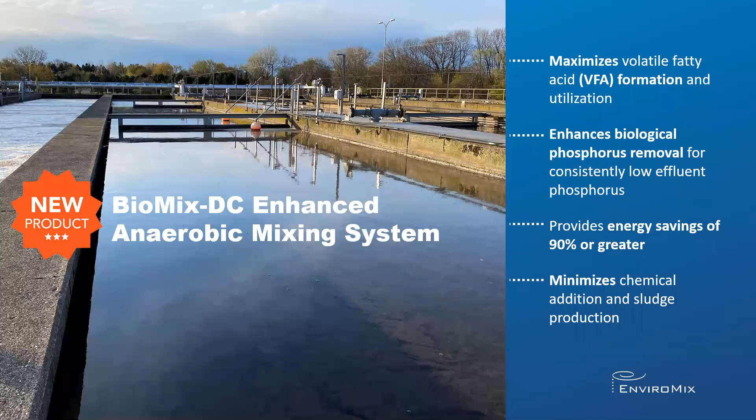BioMix DC Enhanced Anaerobic Mixing System maximizes volatile fatty acid formation and utilization by the biomass. BioMix DC enhances biological phosphorus removal for consistently low effluent phosphorus. BioMix DC provides energy savings of 90% or greater, and minimizes chemical addition and sludge production.

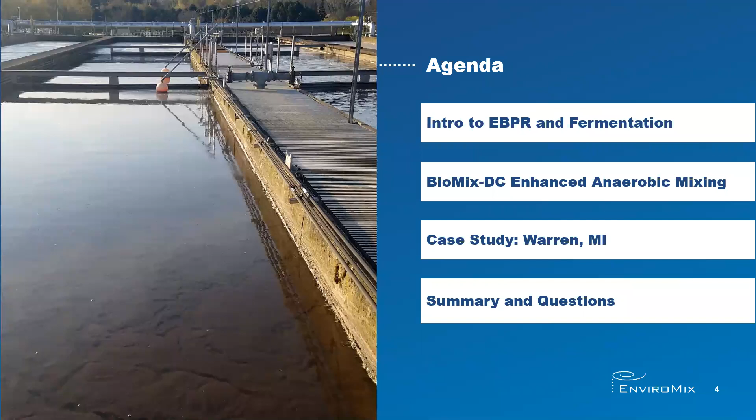Today's agenda for the presentation will be an introduction to enhanced biological phosphorus removal and anaerobic fermentation, introduction of Enviromix's BioMix DC Enhanced Anaerobic Mixing System. We will present details of the Warren, Michigan case study with results of BioMix DC performance. And finally, we'll provide a summary and answer a few audience questions.

Before we move on, we'd like to ask the audience a question. Do you currently have phosphorus regulations? We'll give you a couple moments to respond.

Okay, let's review the results of the survey. Well, from the results, it looks like the majority of those that responded already have a phosphorus regulation or expecting them in the future. That's perfect because this presentation should be of great interest to you.

Now we'd like to provide a brief introduction of enhanced biological phosphorus removal and anaerobic fermentation. Enhanced biological phosphorus removal, or EBPR, relies on the selection and proliferation of a specialized microbial population capable of taking up phosphorus in greater amounts than their normal biological growth requirements.

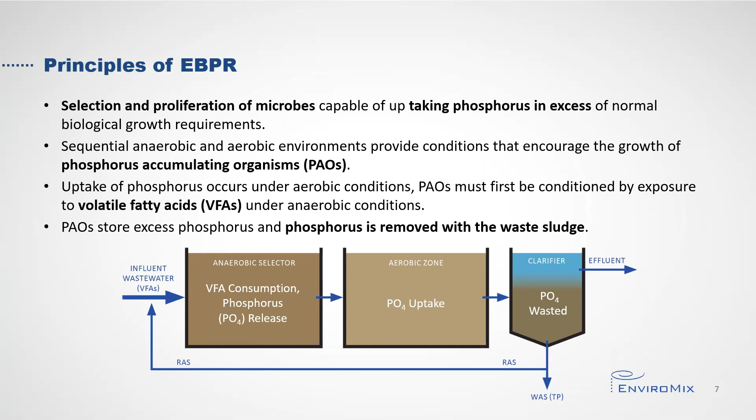EBPR uses sequential anaerobic and aerobic environments to provide conditions that encourage the growth of these specialized phosphorus accumulating organisms, or PAOs. Uptake of phosphorus occurs under aerobic conditions, but PAOs must first be conditioned by exposure to volatile fatty acids, or VFAs, under anaerobic conditions. PAOs store excess phosphorus in their cell mass, and phosphorus is removed with the waste sludge.

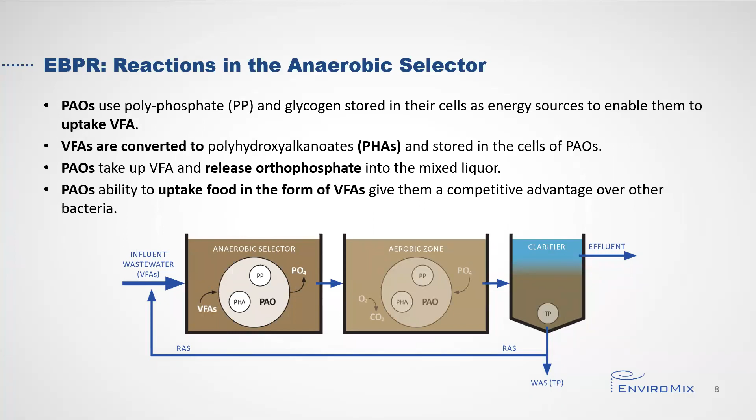Under anaerobic conditions, PAOs use polyphosphate and glycogen stored in their cells as energy sources to enable them to uptake VFA. VFAs are converted to PHA and stored in the cells of PAOs. As they take up VFA, the PAOs release orthophosphate into the mixed liquor. PAOs' ability to uptake food in the form of VFAs gives them a competitive advantage over other bacteria.

Under aerobic conditions, PAOs use PHA as a source of carbon and energy for metabolism and cell growth. PAOs restore their supplies of glycogen and polyphosphate in the aerobic zone. To replenish their stored polyphosphate, PAOs will take up excess phosphate from the mixed liquor. Uptake of phosphorus is dictated by the amount of VFA stored by PAOs and the energy and phosphorus released in the anaerobic zone.

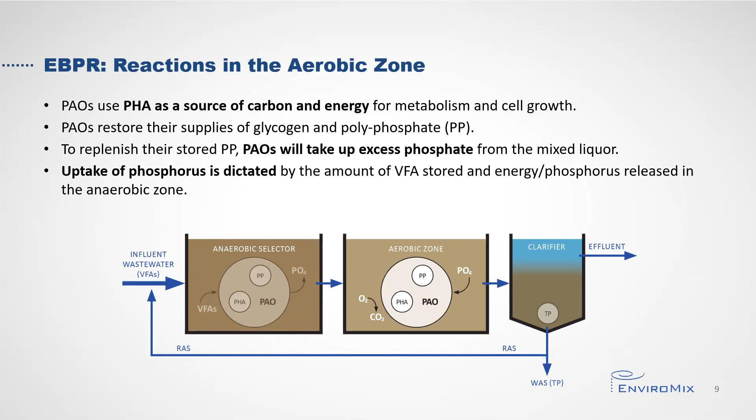Anaerobic fermentation is a common way to boost VFA formation. EBPR success is primarily determined by influent wastewater quality and the amount of VFA present in proportion to the amount of phosphorus to be removed.

VFAs are created through the process of hydrolysis and fermentation, as shown on the image to the right. Complex organic matter, such as carbohydrates, proteins, and fats, are broken down by enzymes to create soluble organics such as sugars and acids. Facultative bacteria then convert soluble organics to VFAs.

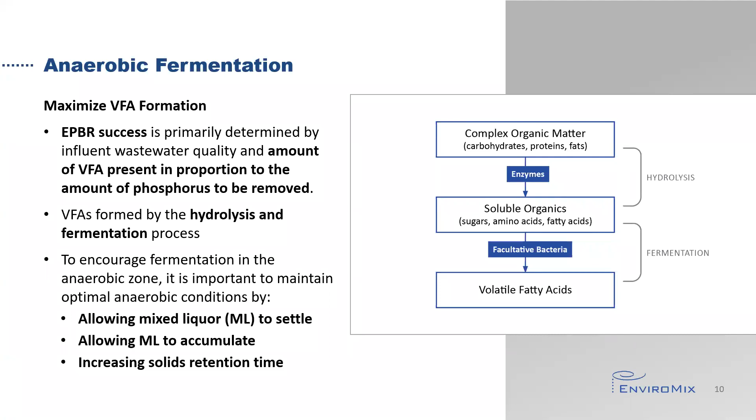To encourage fermentation in the anaerobic zone, it is important to maintain optimal anaerobic conditions by allowing mixed liquor to settle, to accumulate, and to increase solids retention time in the zone.

The most critical factors of EBPR are the integrity of the anaerobic zone and the availability of VFAs. Therefore, the keys to EBPR are an anaerobic zone with strict anaerobic environment, which means negligible free oxygen or bound oxygen, no dissolved oxygen or nitrate.

An anaerobic environment with low oxidation reduction potential, less than negative 150 millivolts, an anaerobic fermentation layer capable of generating VFAs, the optimal mixing regime to produce VFA and transport VFA to the PAOs, surplus VFA production leading to the proliferation of PAOs, whereby PAOs are never VFA limited, with the end goal of low levels of effluent soluble phosphate.

Sarah will circle back to these critical factors when she presents the test results from the Warren case study.

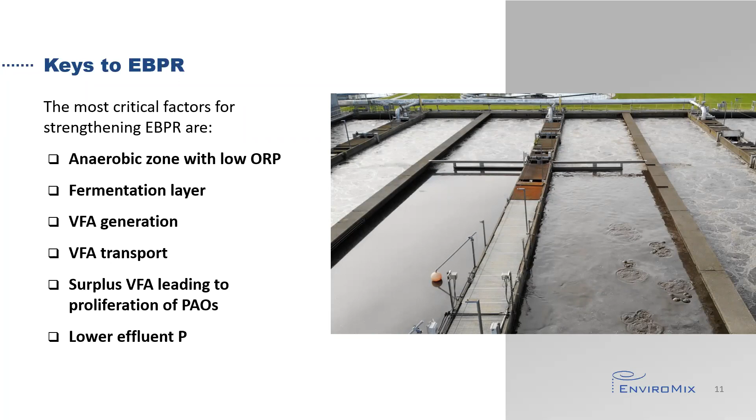In keeping with those keys to EBPR, Enviromix introduces BioMix DC, Enhanced Anaerobic Mixing System. BioMix DC enhances the anaerobic fermentation process by combining a long deep cycle with optimized mixing cycle.

In the deep cycle, long periods without mixing allow solids to accumulate, creating a fermentation layer near the bottom of the anaerobic zone, producing VFAs, which are transported to the PAOs through intermittent pulses of mixing without disrupting the fermentation layer. Following the deep cycle, compressed gas mixing quickly resuspends the solids to homogenize the substrate and microorganisms.

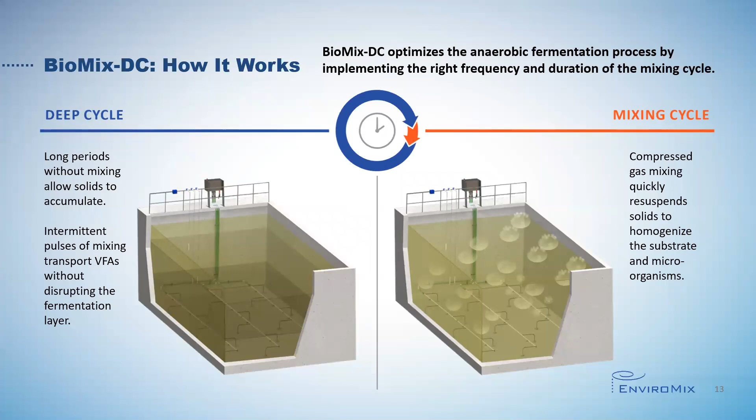In the deep cycle of BioMix DC, long periods without complete mixing cause the anaerobic zone to stratify, with lower concentration of biomass near the surface and solids accumulating at the bottom of the zone. These accumulating solids create a sludge blanket or fermentation layer, which drives down ORP and creates an environment of increased VFA production. The accumulating solids increase anaerobic solids retention time, generating surplus VFA and thereby enhancing biological phosphorus removal.

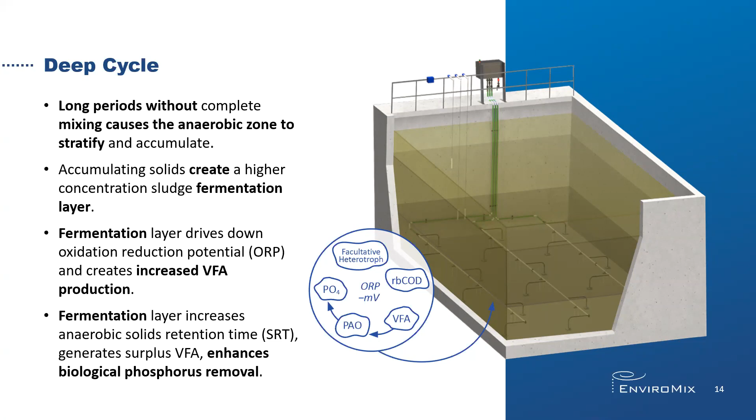To further enhance biological phosphorus removal and create a stable process, the creation of excess or surplus VFA is important. It's also important that VFAs are accessible to the PAOs throughout the anaerobic zone, not only in the fermentation layer. BioMix DC provides intermittent pulses of mixing during the deep cycle to transport VFAs to the PAOs in the bulk liquid without disrupting the fermentation layer. No other process or mixing technology can do this. The result is better biological phosphorus removal and lower soluble phosphorus.

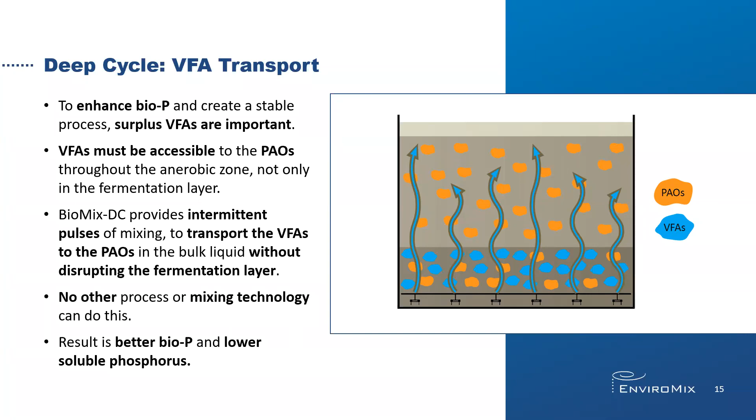Resuspending solids or destratifying the anaerobic zone is important to homogenize the substrate and microorganisms. Rapid resuspension destratifies the selector within minutes. Nozzles near the floor of the tank release short duration bursts of compressed air. Large compressed gas volumes expand upward and outward, and the expanding bubbles provide mixing with controlled turbulence, fluid displacement, and circulatory currents.

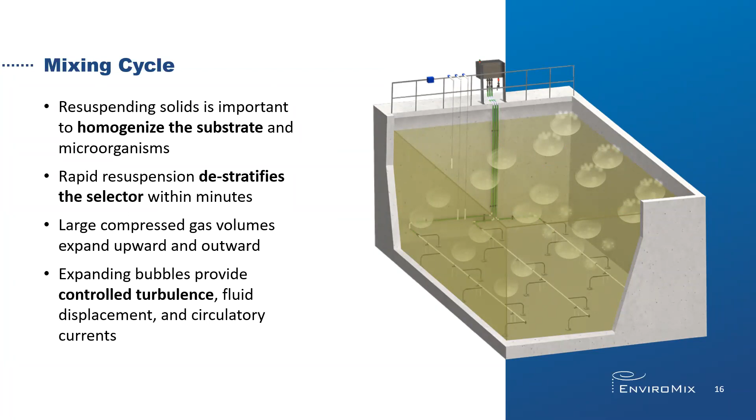BioMix DC leverages Enviromix's core mixing technology, BioMix, which has been successfully applied in biological selector applications for over a decade. BioMix utilizes 40 to 60% less energy than mechanical mixing technologies. The bottom-up mixing regime provides uniform distribution of mixing energy at a very efficient 1/10 of a horsepower per 1,000 cubic feet of anaerobic selector volume.

The control system allows for adjustment of the mixing regime and intensity based on process parameters. All in-tank components are non-clog and maintenance-free.

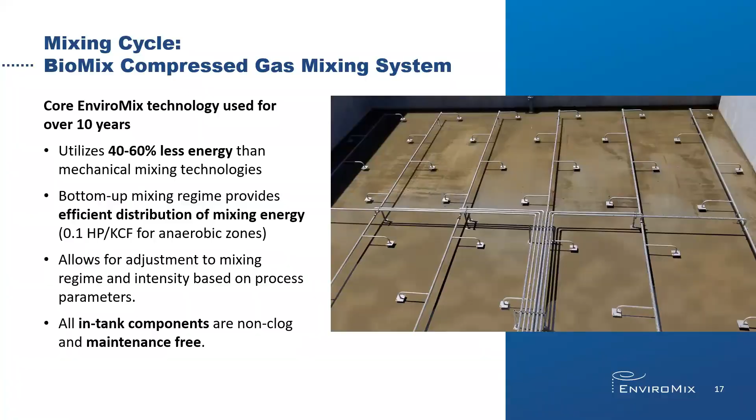BioMix utilizes a central compressor system, typically in duty and standby configuration, to produce the necessary air volume to meet the mixing air demand. This substantially reduces the amount of mechanical equipment to be maintained versus traditional vertical entry or submersible mixers, which require a minimum of one mixer for every mixed tank.

Depending on the application, the compressor system may be in a building, inside a heated and ventilated enclosure, or, if ambient conditions permit, outdoors under canopy. In most applications, compressor output ramps up and down by loading, unloading, or varying speed, which in turn modulates power draw to maintain system pressure.

The compressor charges a receiver tank for air storage, which buffers system demand to maintain a relatively constant system-wide pressure. Depending on the application, a single centralized receiver tank may be provided, or multiple smaller receiver tanks distributed near the mix tanks. The receiver tank supplies air to the valve module, which controls the firing parameters of pressure, frequency of discrete mixing, duration of air release, and header firing sequence.

Depending on the application, a single valve module may control air distribution for all of the mixed tanks, or multiple valve modules may be provided if the system is larger. And lastly, a master control panel may be provided to integrate control of multiple valve modules.

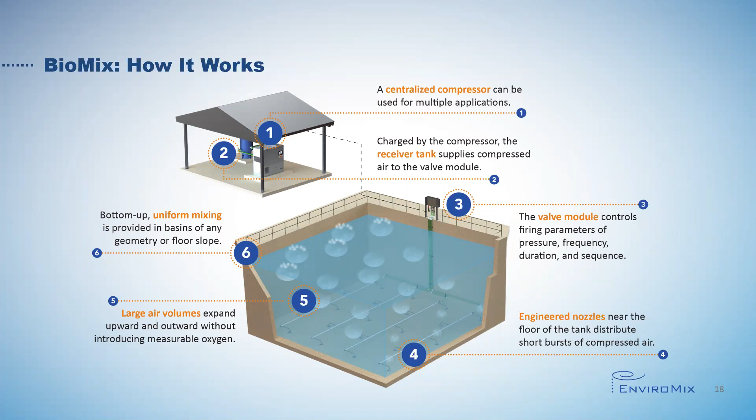BioMix's unique operation of firing individual nozzle headers in sequence allows nozzles to be located at different depths to follow the slope of the tank, including hopper or cone bottoms, eliminating dead zones and maximizing tank volume utilization.

Before turning the presentation over to Sarah, I'd like to ask the audience a question: how strong of a correlation do you think there is between accessibility to excess VFA and consistent BioP performance? We'll give you a couple moments to respond.

Let's review the results of the survey. Very interesting. From the results, it looks like the majority overwhelmingly believe there is a strong correlation between accessibility to excess VFA and consistent BioP performance.

Now let's see if the performance results Sarah is about to present from the Warren case confirm that opinion.

Thanks, Dave. I would like to proceed forward now in presenting the results of our testing. There we go, sorry about that.

I'd like to proceed forward now in presenting the results of our testing at the Water Reclamation Facility in Warren, Michigan. Before I start, I want to publicly thank the plant operations and lab staff for their support during this testing. Not only did they allow us to come to site and use their lab to analyze dozens of samples, but they also assisted in sample collection and analysis on days when we weren't able to be on site. So thank you to Joe, Bernard, Andrew, Bob, Brian, and the rest of the staff, along with our local rep, Jay.

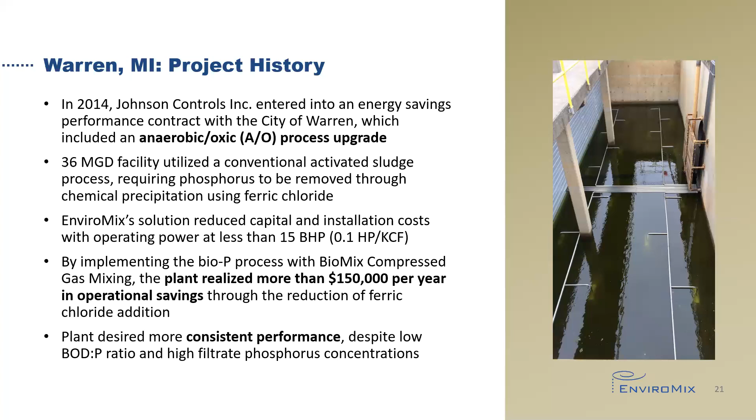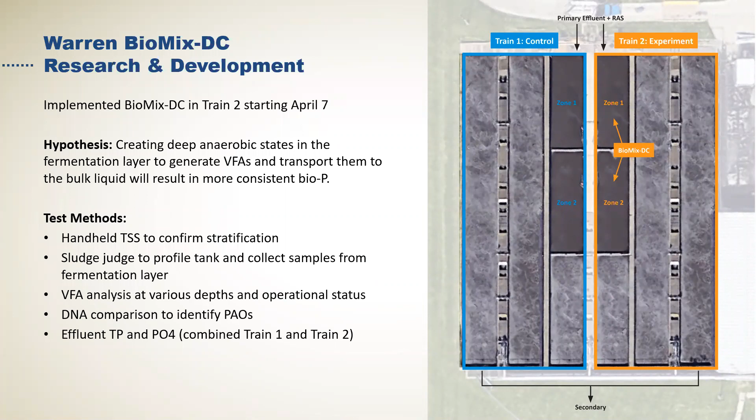If you recall from Dave's discussion about the most critical factors for strengthening EBPR, the first requirement was having an anaerobic zone with low ORP. Prior to beginning the Biomix DC testing, we tracked ORP in Train 2, Zone 1 at mid-depth, about 3/4 of the way down the length of the tank.

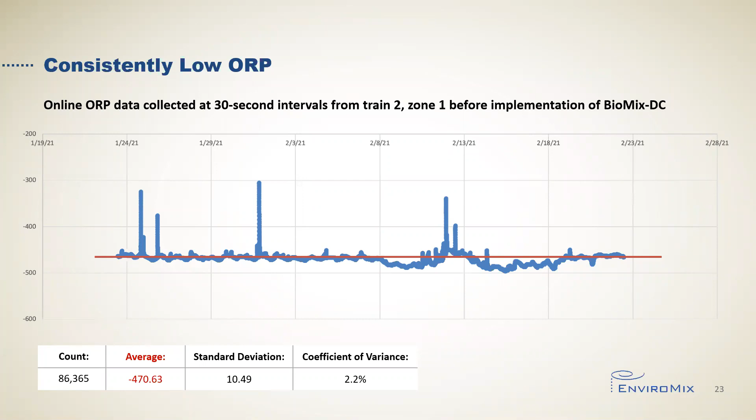During this time frame, the anaerobic tank was completely mixed 24/7 with our Biomix compressed gas mixing system. As you can see, the ORP readings were very stable and averaged around -470 millivolts. ORP readings remained at this level throughout the duration of our testing during both the mixing cycle and the deep cycle. We did not measure any substantial difference in the ORP readings in the bulk liquid compared to the fermentation layer, despite the fact that we may have expected that. This could be attributed to the already very low readings at this facility. So with that, we're going to check the box that Biomix DC provides low ORP conditions to promote EBPR.

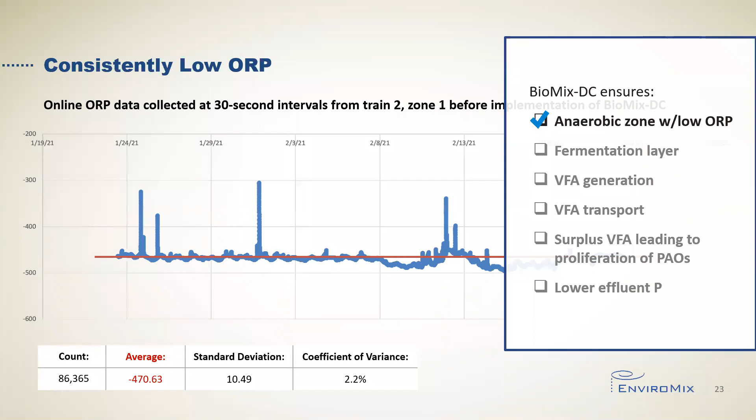Next, we will investigate the development of a fermentation layer. When mixing is suspended and solids are allowed to accumulate, it is expected that a sludge blanket will form at the bottom of the tank. To confirm this, we used both a sludge judge and a handheld TSS meter and took measurements during the deep cycle. The sludge judge shows a solids profile from the entire depth of the tank.

In the top photo, you can see that in the middle of the sludge judge, light flocculated sludge is observed, typical of mixed liquor. In the bottom photo, you can see that the bottom 1 to 3 feet of the tank contained a darker, thicker sludge representing the fermentation layer. A handheld TSS meter was used to confirm the visual results.

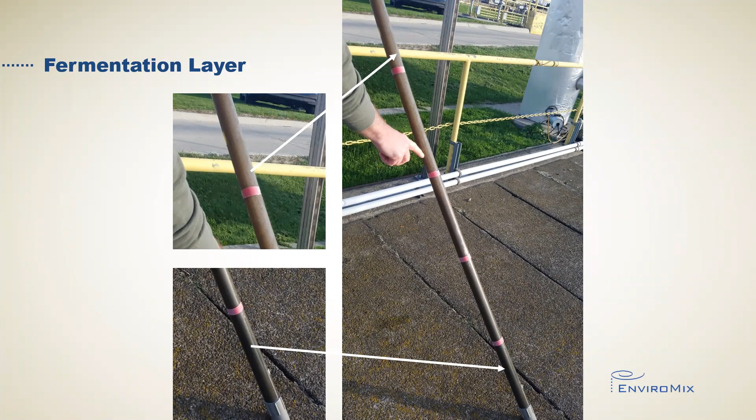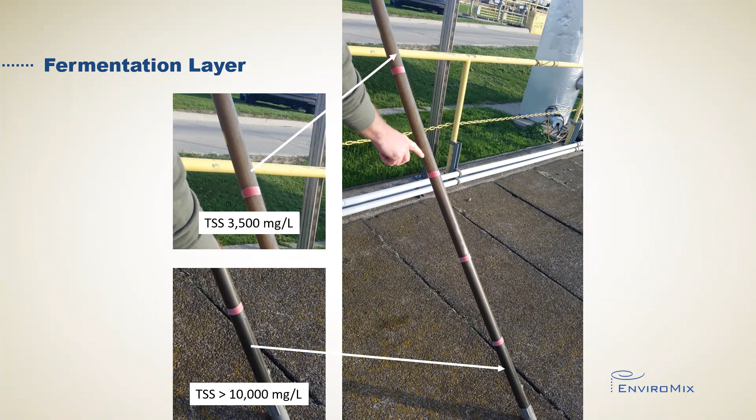The TSS in the bulk liquid, or the majority of the tank, measured between 3,300 and 3,700 milligrams per liter. Immediately below this bulk liquid was a small layer of sludge between 6 and 12 inches with a concentration around 8,000 milligrams per liter. Below that, the fermentation layer measured greater than 1% solids, which was the limit of the handheld meter we had. These results confirm the formation of a fermentation layer in the anaerobic zone.

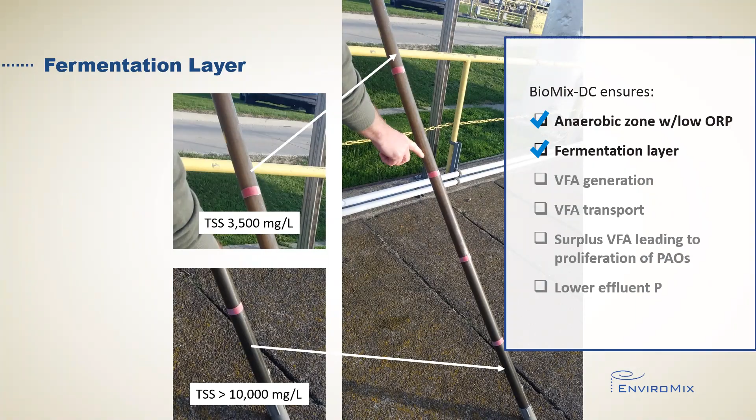Results over a 10-day sample window showed substantially higher VFA readings in the fermentation blanket compared to the bulk liquid. In fact, the samples collected in the bulk liquid were all under range for the test kits that were used, which was all less than 20 milligrams per liter, whereas the samples in the fermentation layer were all in excess of 200 milligrams per liter. The presence of such high VFA concentrations in the fermentation layer indicates an abundance or excess of VFAs. The excess VFAs indicate a healthy anaerobic environment ripe for the first step in biological phosphorus removal.

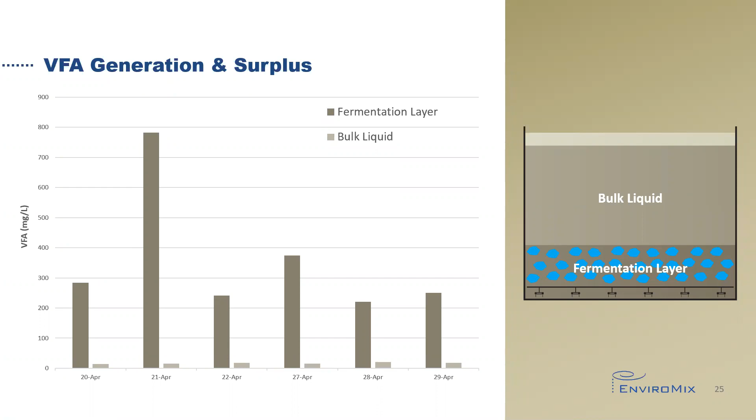The abundance of VFAs indicates that the PAOs present in the fermentation layer are no longer able to take up any additional VFAs. So we can check the box for VFA generation and confirm it is in excess in the fermentation layer, but lacking in the majority of the reactor. The next step is to examine if we can transport the excess VFAs in the fermentation layer up into the bulk liquid so they can be utilized by other PAOs.

After the previous VFA data was collected in April, the unique BioMix-DC intermittent pulses were added to the control logic, and the VFAs were again measured in the fermentation layer. As Dave discussed earlier, an excess of VFA building up in the bottom tank is not optimal, as they can't be fully utilized by all of the PAOs.

To maximize the use of VFA by the PAOs found throughout the entire tank, we want to transport those VFAs up into the bulk liquid. But the key is we want to do that without disrupting the fermentation layer.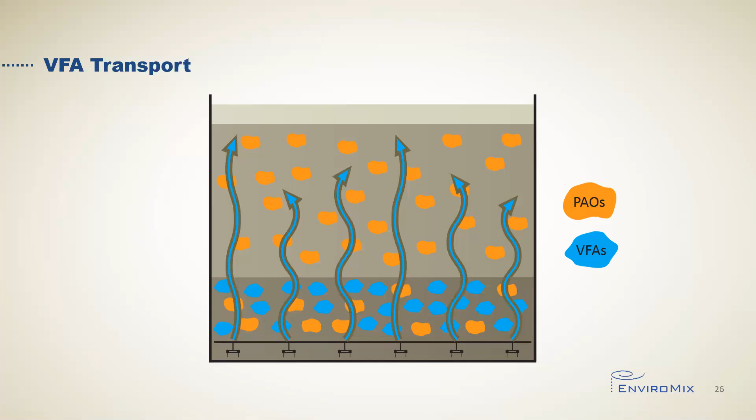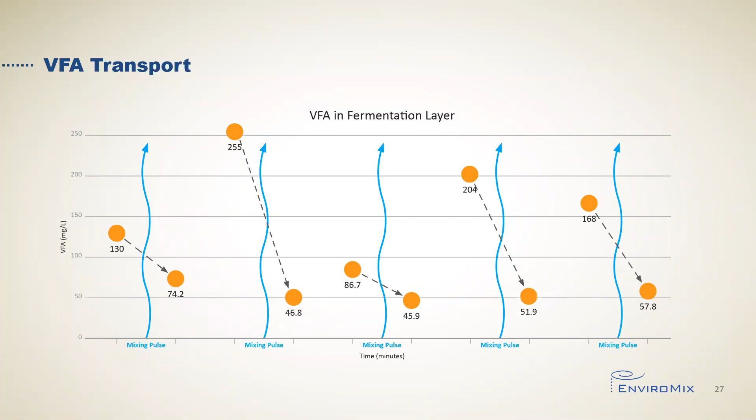We also wanted to confirm that when we were transferring the VFAs from the fermentation layer into the bulk liquid, we were not disrupting the fermentation layer that had formed during the long deep cycle operation. Handheld TSS measurements before and after each intermittent pulse confirmed the higher concentration sludge blanket at the bottom was not disrupted. So that checks our box for VFA transport into the bulk liquid.

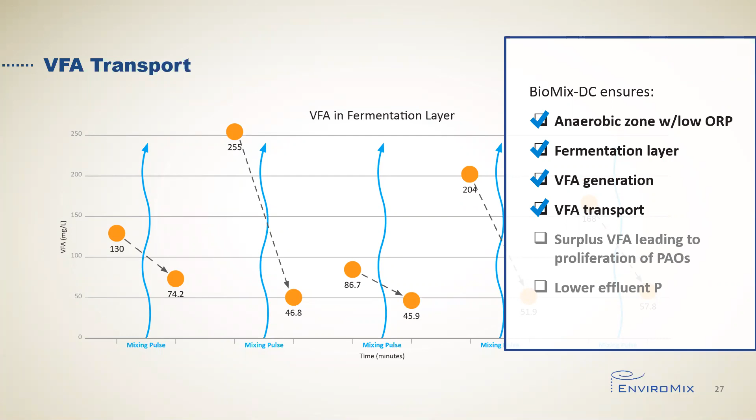In order to discuss the proliferation of PAOs identified in the sludge, we must first look at an overview of the plant again. Earlier, we focused on train 1 and 2 of the plant, which are referred to as the west side. The entire treatment facility consists of 2 separate sludge streams with 2 independent activated sludge systems. The west side is a plug flow design with 3 passes.

The east side has an anaerobic zone up front, just like the west, but then it flows into a complete mixed reactor. The east and west sides of the plant have separate secondary clarifiers, and thus completely independent sludge streams. This makes it ideal for comparing PAO populations using DNA analysis.

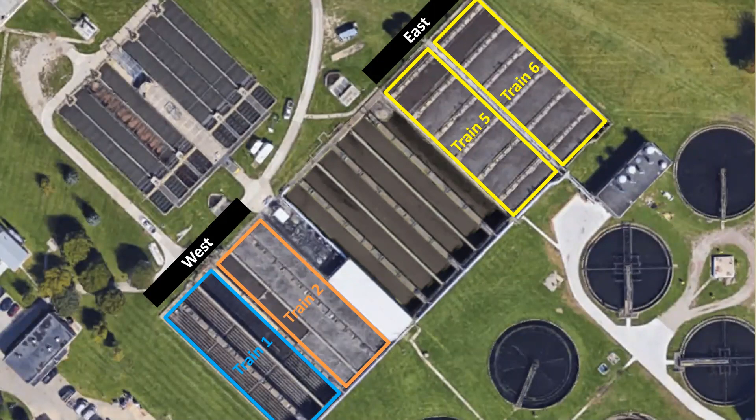One DNA sample was collected from both the east and west sides of the treatment plant, each from the aerobic zones. Both samples were analyzed for PAO species, and the results are shown here as % relative abundance in the sample. The DNA sample from the west side of the plant showed over 12% PAO relative abundance, whereas the east side showed just about 4%.

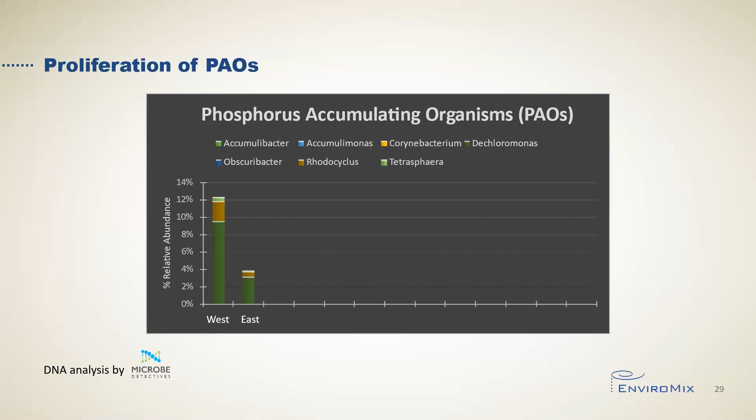For both samples, the dominant organism present is Dechloromonas, which, based on our research, is an important PAO along with the more commonly recognized Accumulibacter and Tetrasphaera. Dechloromonas are often abundant in full-scale EBPR plants and may also be important for nitrogen removal, specifically denitrification.

The DNA analysis were also examined by microbe detectives for correlation to other samples they have received. Their database includes nearly 700 samples from 19 different treatment plants throughout the United States. The different blue bars in the graph represent the individual quartiles of data from their database.

From this, we can see that both the east and the west samples fall within the top 50% of the data points collected at this time. When we discussed the results with microbe detectives, they indicated that the west data point is an outlier since it sits above the 4th quartile, and that is considered a good outcome.

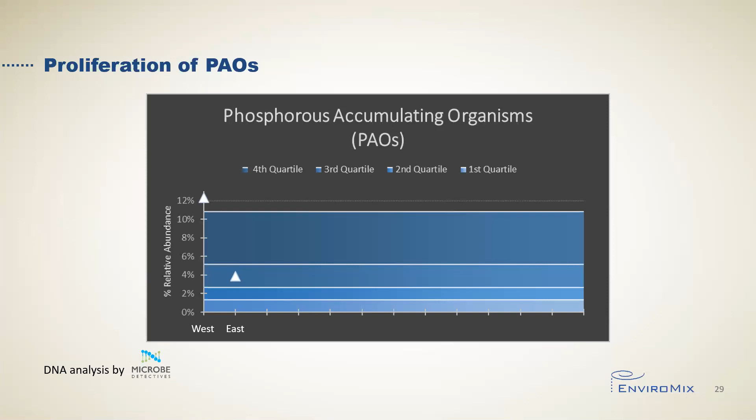They also indicated that there are some other outlier data points that may be in that range that just aren't shown by the way that the data is presented in this graph. So with this, we're able to check the fact that our unique BioMix-DC operation is resulting in a proliferation of PAOs.

Finally, we get to the results that matter most to any treatment facility. How does this impact my effluent quality?

On this slide, we are showing two trend lines. The top line in orange is showing the influent total phosphorus entering the anaerobic zone, including that from the primary clarifier effluent, the RAS, and the side stream processes.

The bottom line in blue is showing the effluent orthophosphorus from the west side of the plant, meaning it is from both trains 1 and 2, despite the fact that BioMix-DC was only operated in train 2. The table on the bottom provides the average influent concentrations for each parameter as it entered the anaerobic zone.

The black dotted line on the graph illustrates the date which we started operation of BioMix-DC. There are two main things I would like to point out regarding the performance.

First, the removal efficiency. Based on the influent and effluent data that we have collected from the plant, the average removal efficiency before implementation of BioMix-DC was only around 65%. Often, the plant found themselves needing to dose ferric chloride to precipitate phosphorus for days at a time to meet their 1 milligram per liter permit.

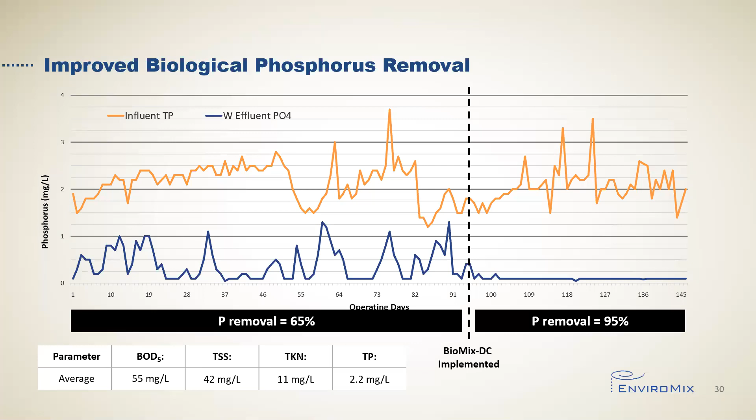After using BioMix-DC in just one of the trains on the west side, the average removal efficiency quickly jumped up to an average 95%. And that's not all. Despite the continued fluctuations in the influent phosphorus shown on the orange trend, the effluent orthophosphorus remains consistently low. This checks our final box, consistently low effluent P.

After we completed our testing in May, the plant has now turned on BioMix-DC in train 1 on the west side of the plant. We are looking forward to continuing to monitor the effluent quality of the west side versus the east side until we are able to complete the controls upgrade to allow the plant to operate both the east side and the west side of the plants as BioMix-DC.

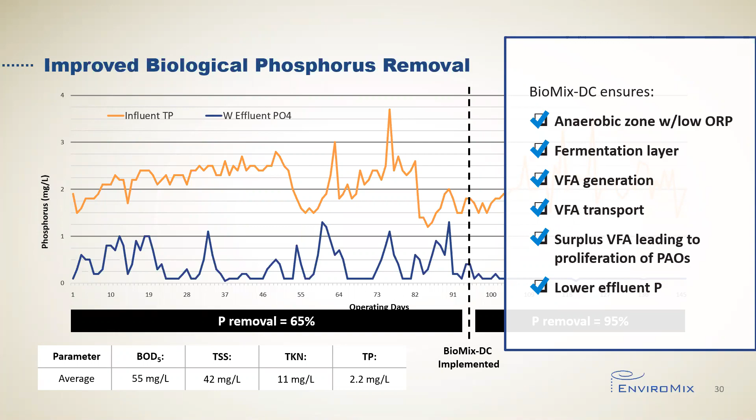Now that we've reviewed all of the testing data from Warren and checked the boxes for the most important factors that contribute to EBPR, I would like to review how BioMix-DC can benefit you.

When people think of operational savings, usually their minds go straight to energy savings, and BioMix-DC does just that. A net energy savings of 90% can be achieved through the combination of eliminating complete mixing for long periods of time and the use of our high-efficiency Biomix mixing system.

While the energy savings are very impressive, it's not the only way that plants save money. There's also substantial savings for plants that need to supplement BioP with either carbon addition and or chemical dosing for precipitation, specifically for plants that have low influent BOD to P ratios or low influent VFAs. Reduction in chemical used for precipitation directly results in reduction of sludge volumes and subsequently reduction of sludge disposal costs.

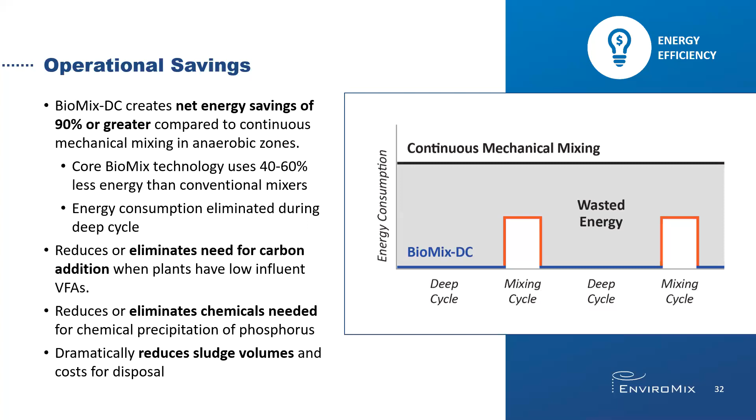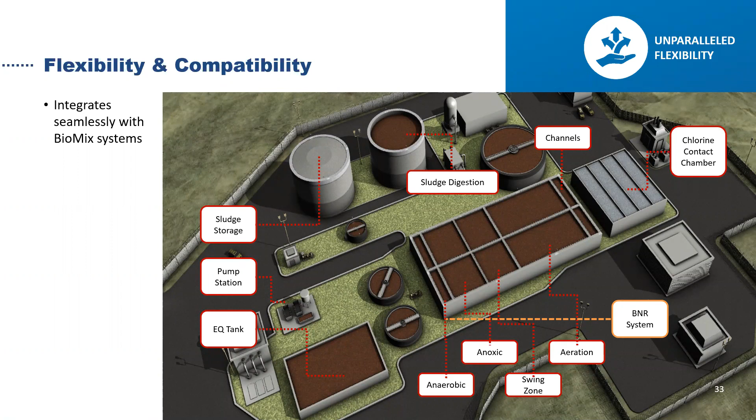BioMix-DC provides unparalleled flexibility to meet the needs of plants of any configuration or size. BioMix-DC is compatible with any and all other Biomix systems that may be on site, whether that be in an anoxic, swing, or post-anoxic zone within the secondary treatment process, or really any location in the plant that requires mixing. The applications shown here illustrate many of the opportunities for Biomix in a wastewater facility.

BioMix-DC demonstrates flexibility and compatibility with regard to how it can be used in many different fermentation configurations. The first of which is inline fermentation, where the primary effluent and the RAS enter an anaerobic tank that is operated as a fermentation tank. This configuration is what we saw in our Warren example earlier. This option is perfect for retrofitting existing anaerobic zones or repurposing excess aerobic volume at plants that don't have any additional tanks or room for newly constructed tanks.

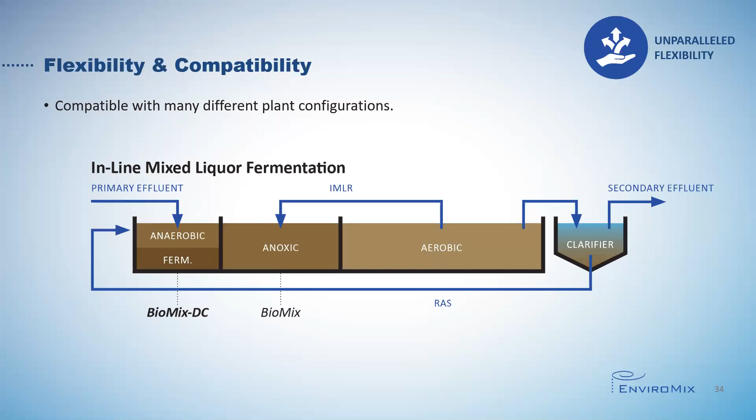BioMix-DC is installed in the anaerobic tank in this configuration, and Biomix is used in the anoxic tank, where it provides constant mixing.

Another configuration that plants may elect to use is side stream RAS fermentation. In side stream RAS fermentation, an auxiliary tank is needed to feed a slipstream of return activated sludge for fermentation. The side stream reactor utilizes the return activated sludge as the substrate for hydrolysis and fermentation to produce VFAs, which are then fed to the mainstream anaerobic zones. The hydraulic retention time in a side stream RAS fermentation tank may be between 12 and 48 hours.

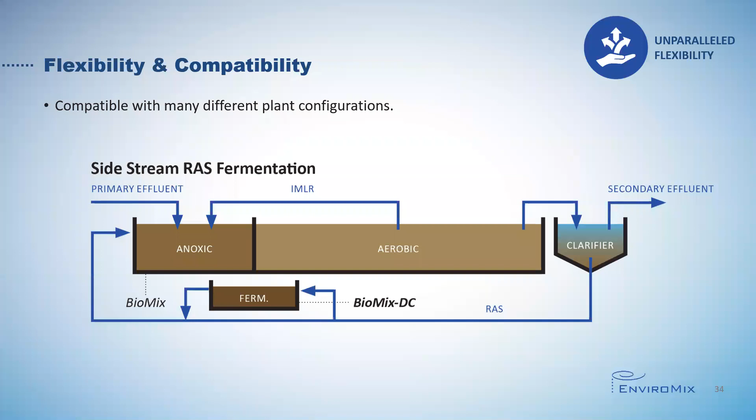In this example, BioMix-DC is installed in the RAS fermentation tank and any anaerobic tank, and Biomix is used in the anoxic tank as before.

Another configuration that plants may elect to use is side stream mixed liquor fermentation. In side stream MLSS fermentation, again, an auxiliary tank is needed. This time, a slipstream of the mixed liquor in the anaerobic zone is sent to the MLSS fermentation tank. This is often used when the plant's existing anaerobic zones need more volume to generate VFAs. Some say that side stream MLSS ferments a higher fraction of soluble organics.

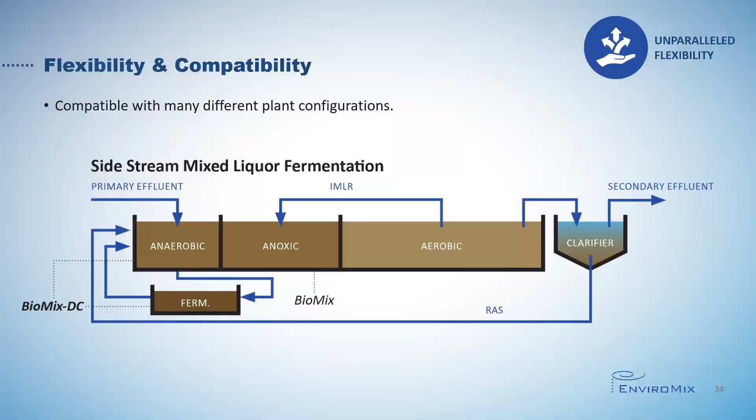For BioMix-DC, it doesn't matter which of these configurations the plant determines is best for their process. BioMix-DC works in all configurations and performs better than the traditional approach of just suspending mixing for long periods of time. Why? Because, as we have shown, BioMix-DC checks all of the boxes needed to strengthen EBPR, including the very important objective of transporting excess VFAs to PAOs that are waiting to take them up.

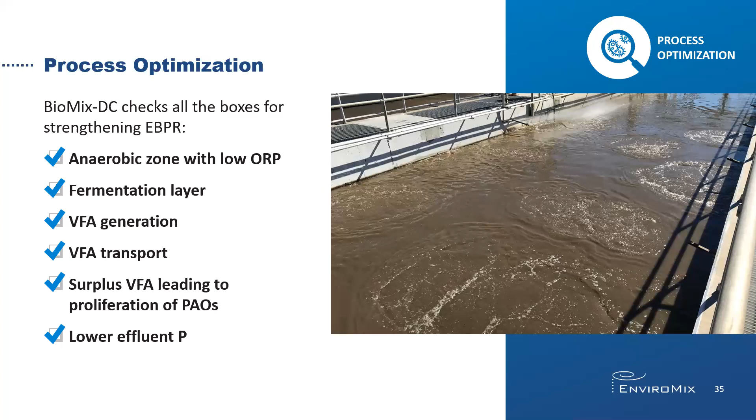In summary, BioMix-DC ensures an anaerobic zone with low ORP is present, creates a fermentation layer at the bottom of the tank during the long, deep cycle, generates VFAs in the fermentation layer, transports those VFAs to the PAOs that are present throughout the bulk liquid, resulting in a proliferation of PAOs in the mixed liquor, and ultimately consistent low effluent phosphorus.